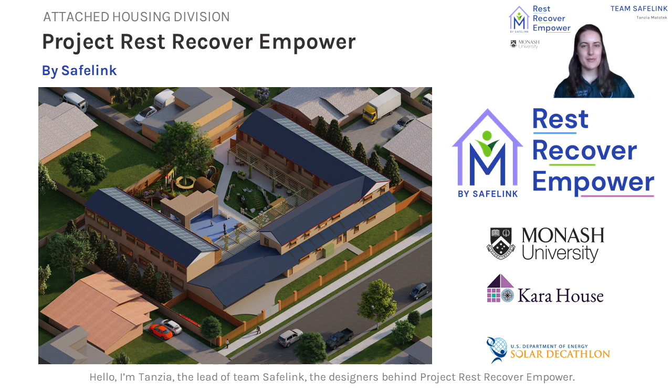Hello, I'm Tanzia, the lead of Team SafeLink, the designers behind Project Rest, Recover, Empower. Team SafeLink is a diverse group of undergraduate engineering and architecture students from Monash University in Australia, and we're passionate about designing safe housing communities for Australians in need. We're a team of 17 students, but presenting with me today is Sav, Lucille, Jamali, and Cheyenne to step through our design. Project Rest, Recover, Empower, or Project RRE, is a purpose-built refuge for women and children experiencing domestic violence.

These key values, rest, recover, empower, guided us to create a residential complex where these women in need can rest, where they and the environment can recover through sustainable design solutions, and ultimately where all occupants and stakeholders involved can be empowered.

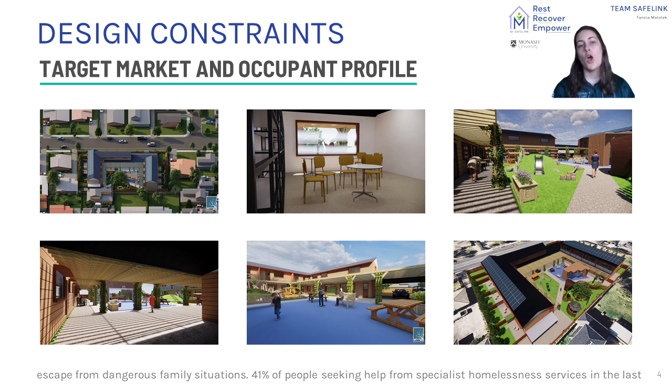Statistics show that it takes an average of 7 attempts for a woman to leave an abusive situation. Given that there are waitlists of over 2 weeks for current domestic violence refuges, Project RRE meets the desperate need for dedicated refuge housing in Victoria, providing a place of stability and support for families who are forced to escape from dangerous situations. 41% of people seeking help from specialist homelessness services in the last year were experiencing domestic and family violence. These situations could only have worsened with extended lockdown from COVID.

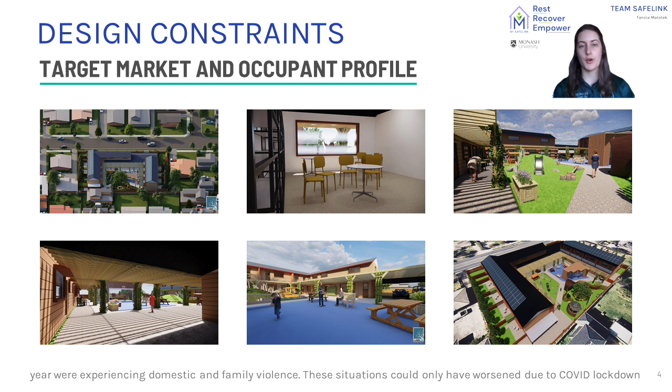Working with Kara House, a not-for-profit organisation which provides support and temporary housing for victims of domestic violence, we have designed an attached housing complex to cater to women of all ages and cultural backgrounds, inclusive of women with children, disabilities, and those identifying as LGBTQI+. As a government-funded facility, Project RRE is the first of its kind to provide dedicated, purpose-built spaces to support these women in need.

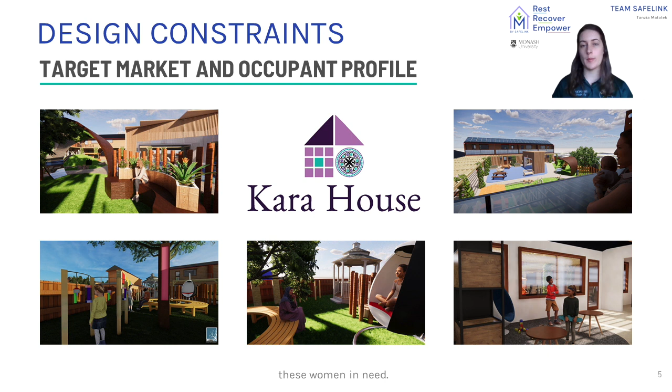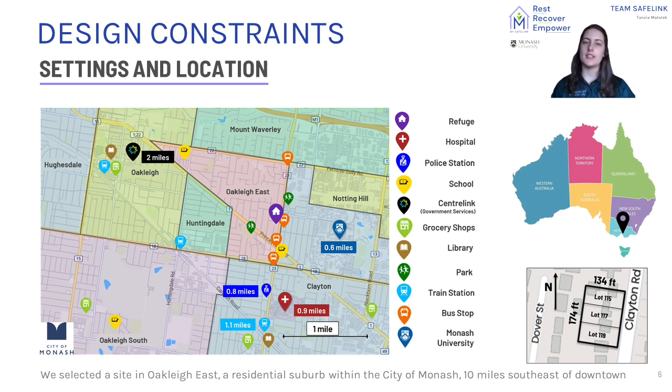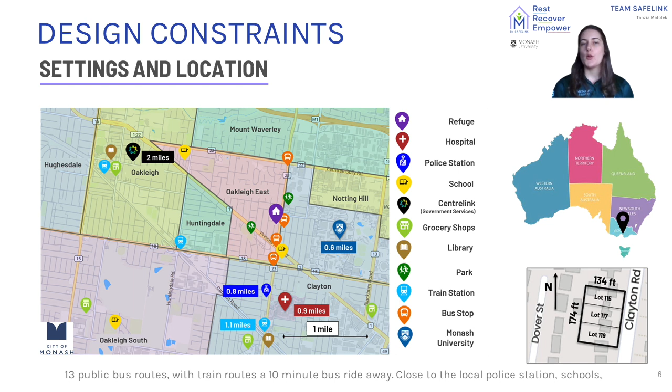For our site, we selected a plot in Oakleigh East, a residential suburb within the city of Monash that has a population of 6,500 and is located 10 miles southeast of downtown Melbourne, the capital city of Victoria, Australia. The plot is centrally located within walking distance to shopping districts and 13 public bus routes, with train routes a further 10-minute bus ride away. Close to the local police station, local schools, libraries, and health and government services, Oakleigh East is a safe, low-crime area that provides easy access to all the services an occupant of the refuge would require.

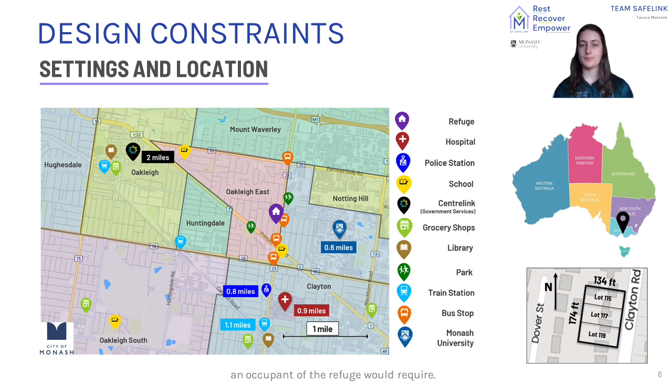Oakleigh East is within the metropolitan Melbourne area within the Australian Climate Zone 6, the equivalent to the US Zone 3C. It has a temperate climate categorised by moderate rainfall and limited temperature extremes. Located in the Southern Hemisphere, winter occurs from June to August, where Oakleigh East has an average daily minimum temperature of 43 degrees Fahrenheit, with summer occurring from December to February with an average daily maximum temperature of 78 degrees Fahrenheit. Having 2,700 heating degree days and only 450 cooling degree days means that heating is a greater consideration for the design. Approximately 29 inches of rain falls evenly across the year, making it suitable for rainwater harvesting.

If you're not familiar with Melbourne weather, it's known for experiencing all 4 seasons in one day, with weather conditions never lasting long and the sun coming out to shine for over 2,200 hours per year. This makes it an ideal climate for solar energy generation, which is the cheapest and most reliable renewable source for Australia.

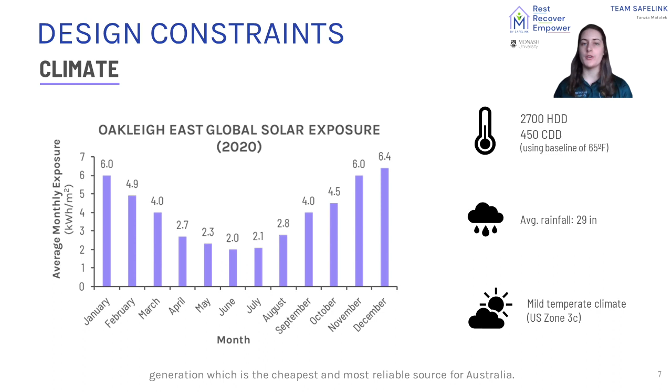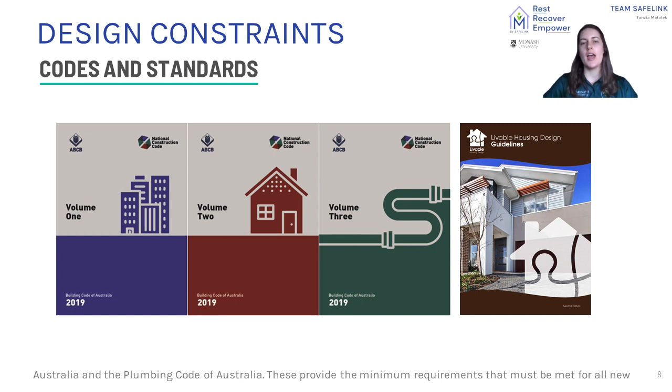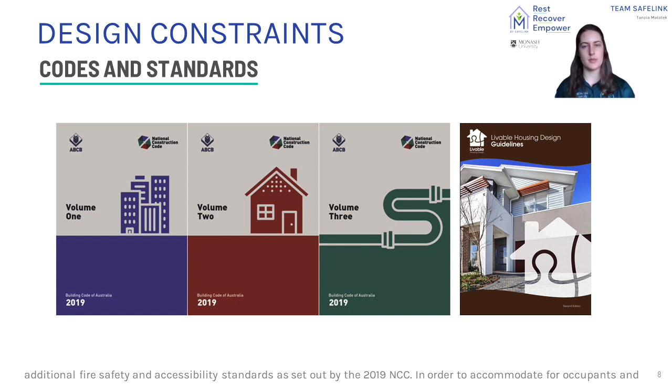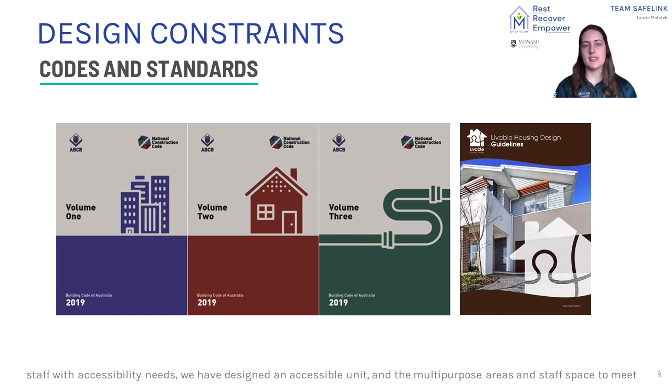The Project RRE building was designed in accordance with the 2019 National Construction Codes, which contain the Building Code and the Plumbing Codes of Australia. These provide the minimum requirements that must be met for all new buildings throughout Australia. The refuge is classified as a Class 3 residential building and is therefore required to meet additional fire safety and accessibility standards. In order to accommodate for occupants and staff with disabilities, we've designed a dedicated accessible unit and made sure that the multipurpose areas and staff space meet the highest standard in the Livable Housing Australia guidelines for disabilities.

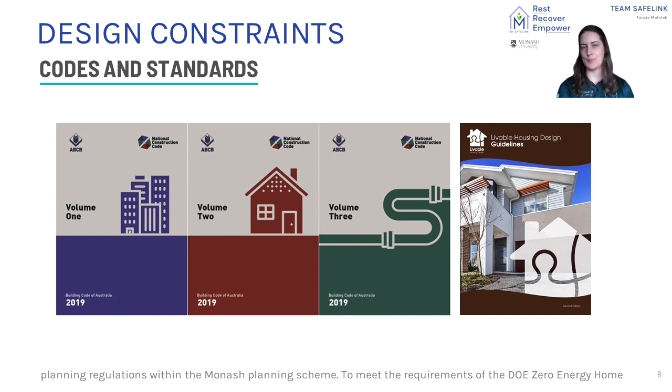Additionally, the building adheres to local council planning regulations within the Monash planning scheme, and to meet the requirements of the DOE Zero Energy Home, the prescriptive path was taken and comparisons were made between equivalent Australian standards when necessary so that we could meet all exhibits. Hopefully that's provided you enough context for the project, and I'll now pass on to Sav, who will go through our design goals.

Project RRE follows 5 key design goals, which address Cara House requirements. The most imperative goal was to create purpose-built spaces, such as the multi-purpose room for group therapy, restorative gardens, and dedicated staff areas to manage the refuge operations. Within the units, it was important to create a comfortable space that was suited to short-term occupancy periods, and Cara House emphasized how it was necessary to balance not being too comfortable or luxurious, as the goal was to get women back up on their feet and out of the refuge quickly, so they can continue their journey of recovery. Flexibility is a key design principle that sets our project apart.

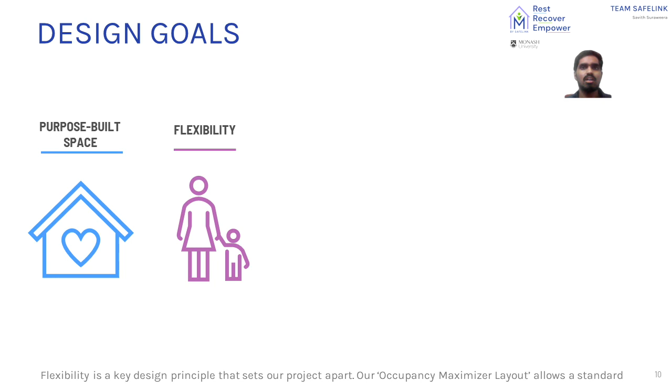Our Occupancy Maximizer layout allows a standard 2-bedroom unit to be converted into a 1 or 3-bedroom unit using an operable wall. This allows Cara House to adapt the units to varying occupant profiles, and accept women at the top of the waitlist. It also ensures that the complex maintains optimal capacity across the year and decreases wait time for women desperately needing a safe place to stay.

Given the dangerous situations these women are escaping, security and privacy were prioritized. This is done actively using security cameras and keycard access points, as well as passively through the site design. A U-shaped site layout provides an enclosed area hidden from the street, and the communal garden creates restorative areas of seclusion while also maintaining visibility to monitor occupant well-being.

The complex was designed to be easy to operate and maintain to smoothen the transition between occupants, which occurs every 4 to 6 weeks. The staff space allows 24/7 staff supervision, and the units have minimal storage and easy-to-clean surfaces to reduce changeover periods.

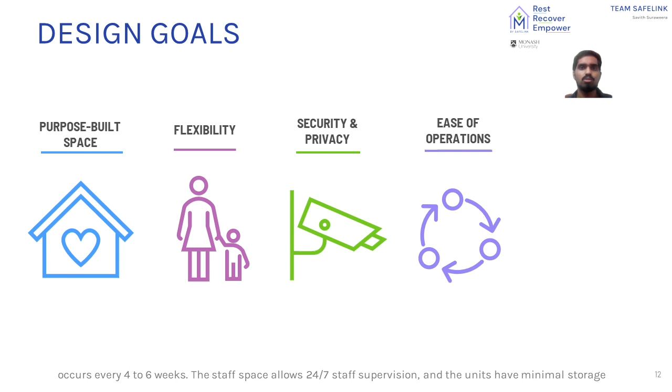The last consideration was to make sure the design appeals to all stakeholders of the refuge, not only the occupants and Cara House who will be using the refuge, but also the government who will be funding the project, and to demonstrate how a net zero refuge can be more efficient and cheaper over the long term. I'll now hand it off to Lucille to talk about the rest aspect of our project.

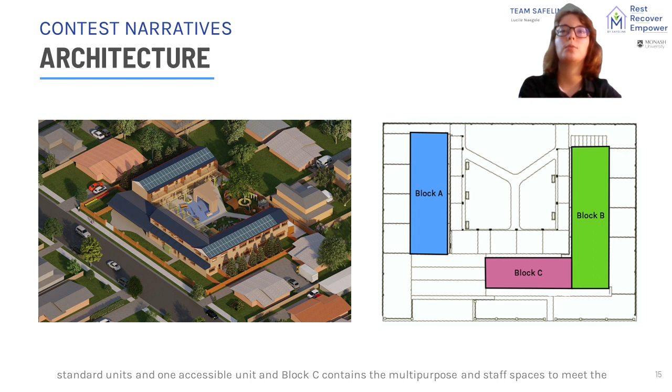The first major focus of the project was creating a residential space where the occupants can rest. Project RE has been designed as 3 blocks. Block A contains 4 standard 2-bedroom units, Block B has 3 standard units and 1 accessible unit, and Block C contains the multipurpose and staff spaces to meet the operational requirements of the refuge. In the center of the blocks is a communal garden to suit children of all ages, as well as an accessible pathway covered by a timber louvred pergola, providing access to each unit.

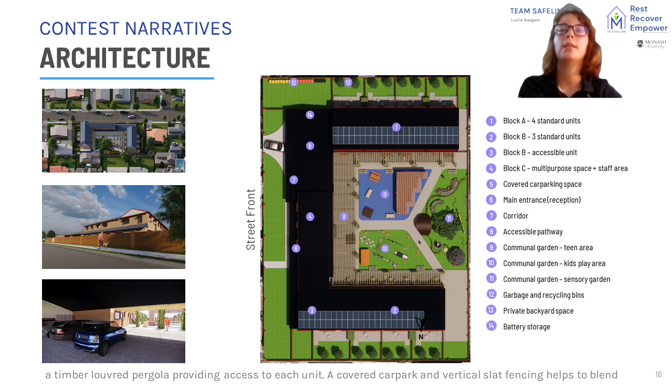The covered car park and vertical slat fencing help to blend in with the surrounding buildings and create a continuous front facade. There are 8 2-story residential units, all with an identical layout, except the 1 accessible unit which has greater clearances to accommodate wheelchair users. Each standard unit has 2 bedrooms, a fully functional kitchen, a bathroom, and 2 living spaces, 1 upstairs and 1 downstairs, as well as a private backyard and balcony space.

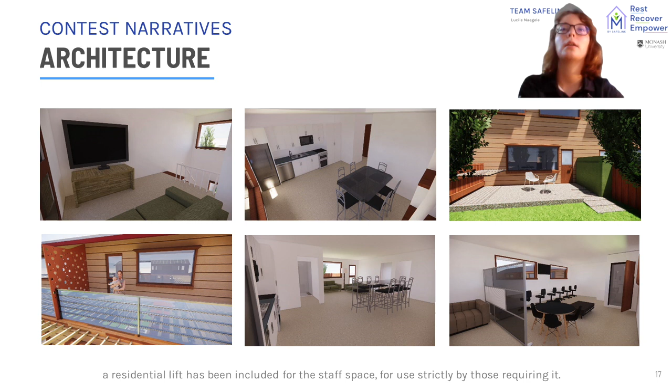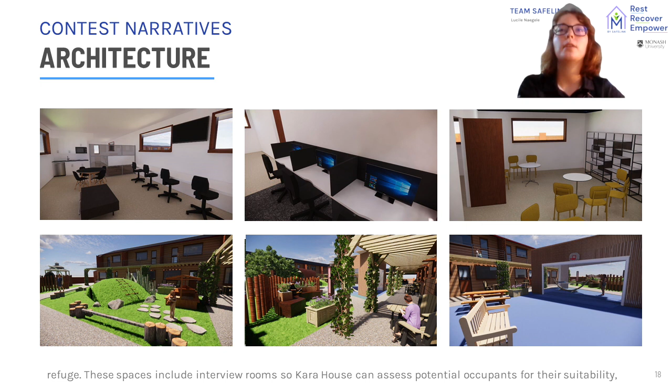Occupant safety has been prioritized with high balcony railing and wall-mount stair gates. To meet workplace equality requirements, a residential lift has been included for the staff space for use strictly by those requiring it. In addition to the residential units, a dedicated multipurpose and staff space have been designed for the operation of the refuge. These spaces include interview rooms so that Kara House can assess potential occupants for their suitability, child play areas, a shared computer for occupant use, and a flexible space for group therapy and other activities.

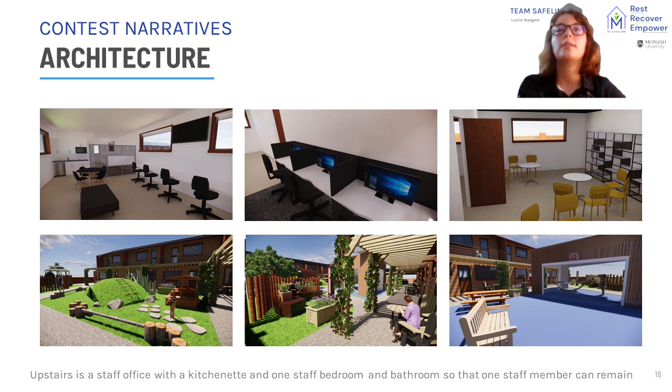Upstairs is the staff office with a kitchenette and 1 staff bedroom and bathroom so that 1 staff member can remain on site at all times as per refuge requirements. In the center of the complex is a communal garden that contains a natural playground for small children and a small basketball and soccer net for older children. Seating out the front of each unit and the multipurpose space allow occupants to supervise the children as they play and create opportunities for interaction.

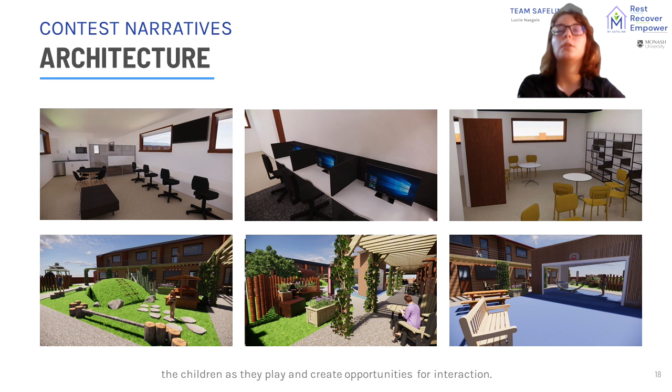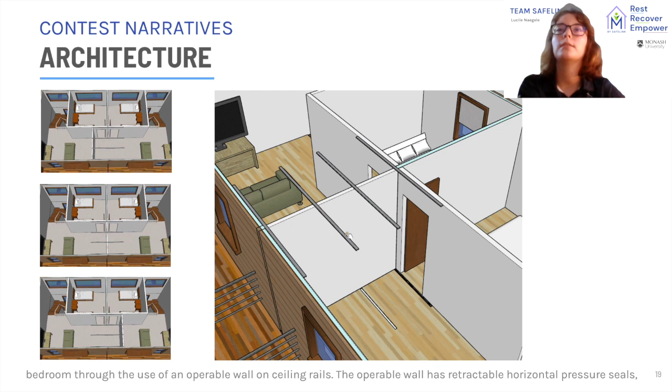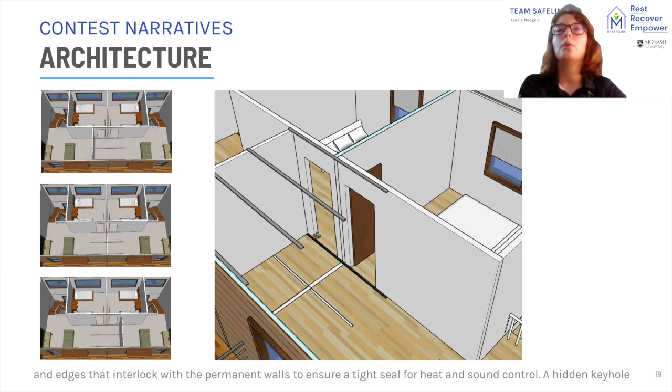The key design in Project RE is the Occupancy Maximizer layout that changes which unit has access to the upstairs bedroom through the use of an operable wall on ceiling rails. The operable wall has retractable horizontal pressure seals and edges that interlock with the permanent walls to ensure a tight seal for heat and sound control. A hidden keyhole allows the door to be locked in place, and only Kara House will alternate the positions during occupant changeovers.

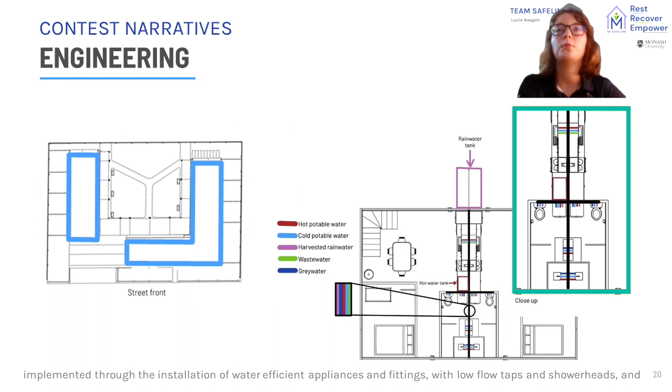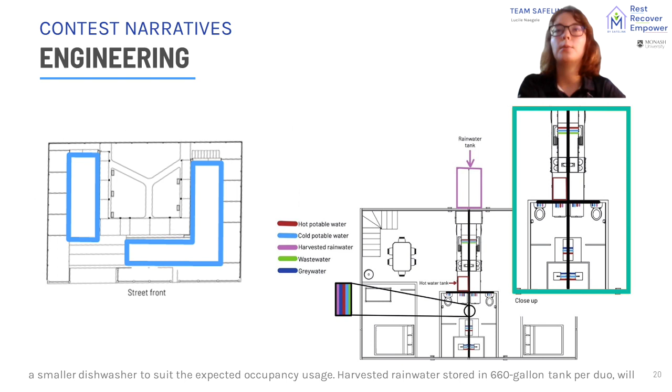The site has been designed so that there are 2 building envelopes so that subsystems can be shared across the units. This allows all utilities to be centralized along the adjoining wall of a 2-unit duo. Water efficiency strategies have been implemented through the installation of water-efficient appliances and fittings, with low-flow taps and shower heads, and a small dishwasher to suit the expected occupancy usage. Harvested rainwater stored in a 660-gallon tank per duo will provide water for toilet flushing and clothes washing. Grey water collected from showers is used for garden irrigation.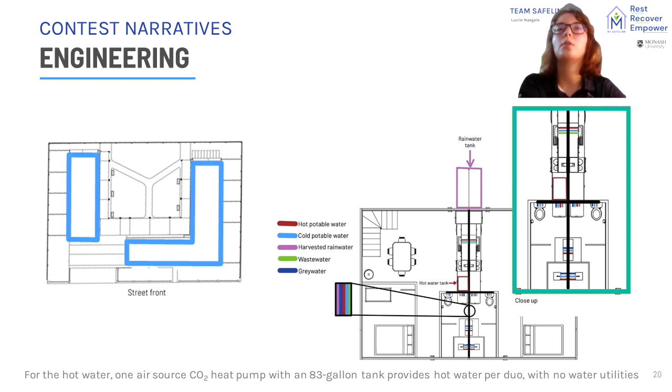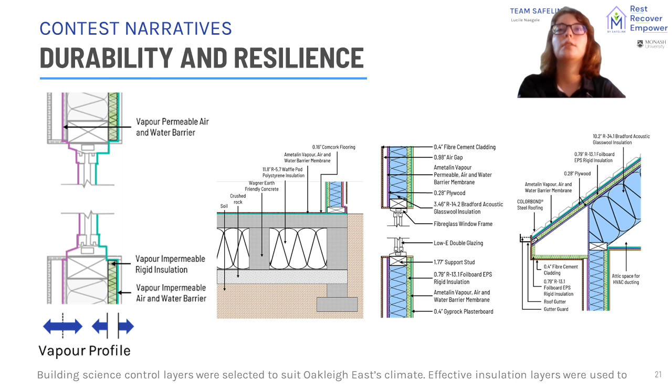For the hot water, 1 air source CO2 heat pump with an 83-gallon tank provides hot water per duo, with no water utilities on the first floor of the residential blocks to reduce plumbing infrastructure. Building science control layers were selected to suit Oakleigh East's climate. Effective insulation layers were used to reduce heating loads.

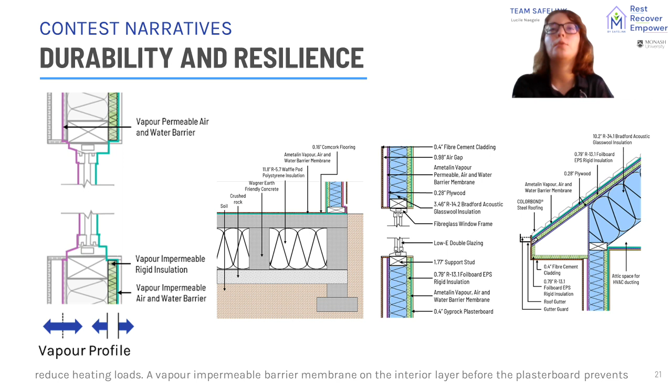A vapor-impermeable membrane on the interior layer before the plasterboard prevents warm air from inside leaking into the wall cavity, where it is at risk of condensing in cooler weather. The vapor-permeable watertight external membrane allows any warm air that does escape into the wall cavity to exit to prevent mold formation. Both these membranes are also air and watertight, preventing entry both internally and externally. These membranes create a continuous seal across the foundation, walls, and roof of the buildings to create a strong thermal, vapor, air, and water envelope.

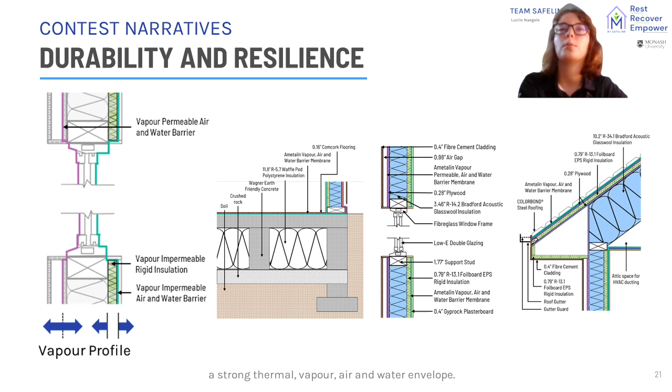To further increase the durability of the refuge over its 50-year lifespan, locally sourced Australian materials were selected to withstand Melbourne's climate conditions. Some examples include fiber cement cladding, which is low maintenance and durable. Colorbond steel roofing is hail resistant, easy to install and replace, and is flame resistant.

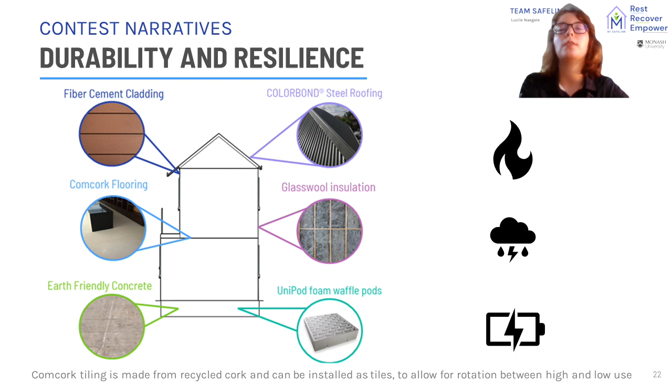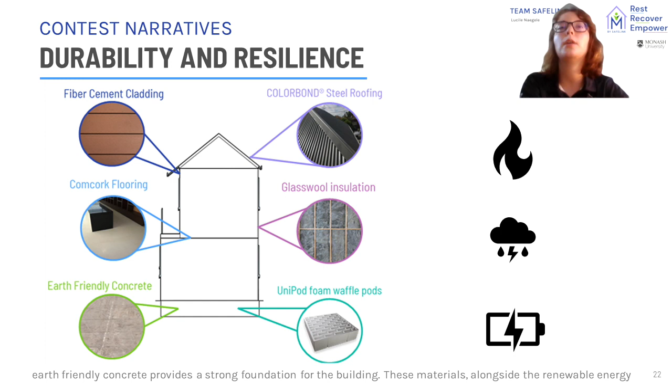Comcork tiling is made from recycled cork and can be installed as tiles to allow for rotation between high and low use areas to extend the life cycle of the material. Glass wool insulation is non-combustible to protect against fire, and finally, earth-friendly concrete provides a strong foundation for the building. These materials, alongside the renewable energy battery system, protect against the biggest threats of fire, storms, and electrical blackouts.

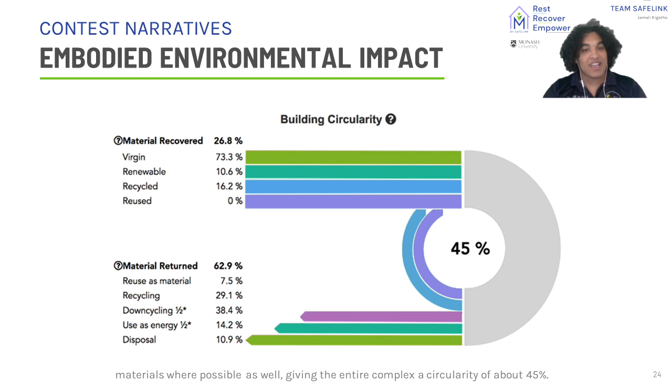So when choosing our materials, we prioritise locally sourced materials and lightweight construction to overall minimise the emissions involved in building the refuge. We wanted to use renewable and recycled materials where possible as well, giving the entire complex a circularity of about 45%. A key consideration for this when looking at the embodied environmental impact was the large cement slab we use for our foundation. To minimise the emissions involved in this, we used an earth-friendly cement that has 45% lower emissions than traditional Portland cement, and we also used a waffle pod grid to greatly reduce the amount of cement we actually needed to build the slab.

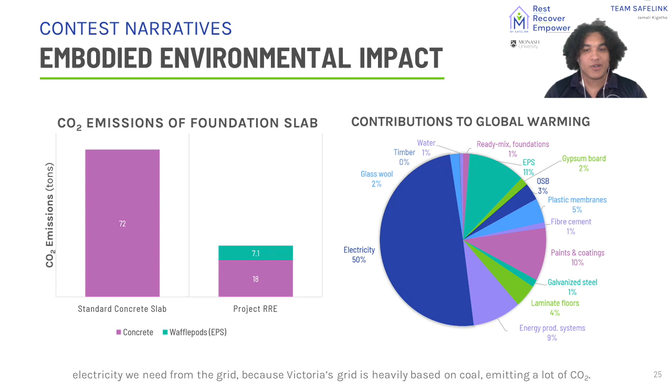And with all these factors considered, we found that our biggest impact on climate change would be due to the electricity we need from the grid, because Victoria's grid is heavily based on coal and emits a lot of CO2. So given this, it was very important for us to reduce our reliance on the grid. Given Melbourne's sunny climate, solar was the obvious option for us, and we tested two systems.

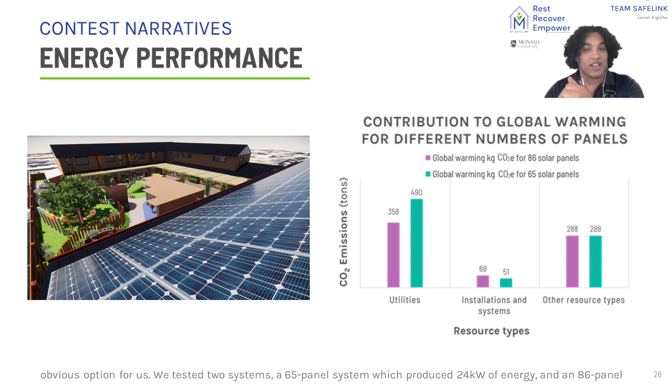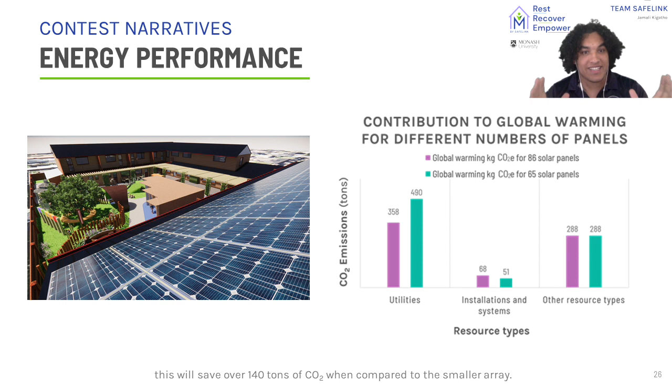We tested a 65 panel system which produced 24 kilowatts of energy, and an 86 panel system that produced 32 kilowatts of energy. We ended up going with this larger one because it reduced our dependence on the grid to only 16% across the whole year, and over the lifespan of the building would actually save 140 tons of CO2 when compared to the smaller array. We coupled this larger array with four 10-kilowatt-hour batteries to help Kara House have maximum flexibility and adaptability depending on the occupants' different usage rate, because that will be changing all the time.

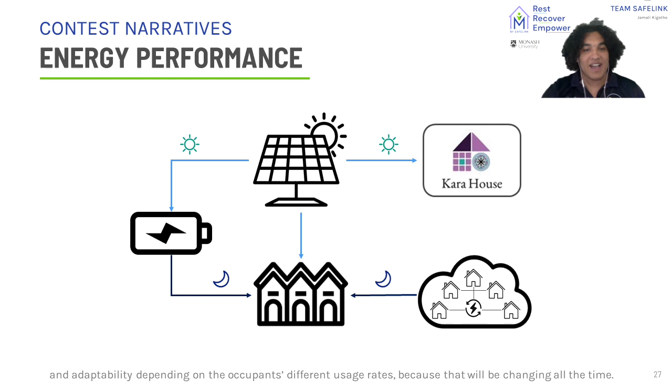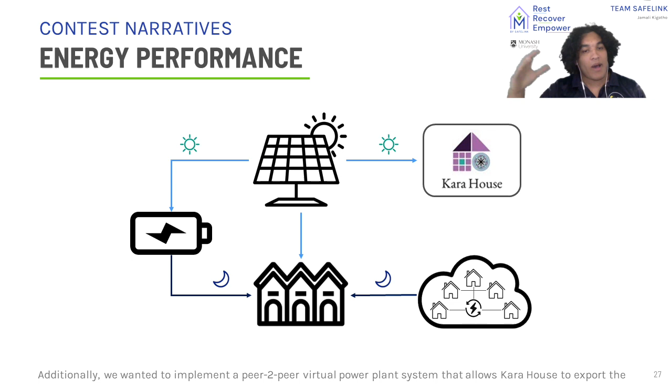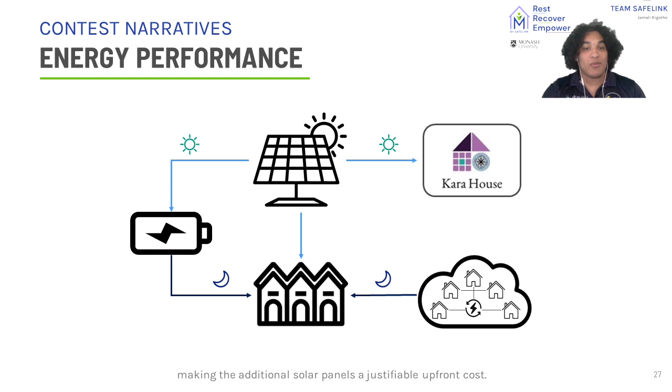Additionally, we also wanted to implement a peer-to-peer virtual power plant system that allows Kara House to export excess solar energy, especially in summer, to nearby transition housing to overall reduce Kara House's carbon footprint even more. And also by providing them more funds, this will save them about $50,000 over 20 years. And this made the additional solar panels a justifiable upfront cost. The energy modelling showed that only 84% of our energy was produced on site.

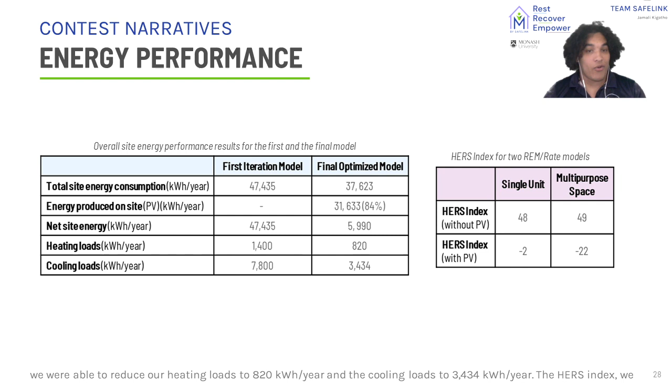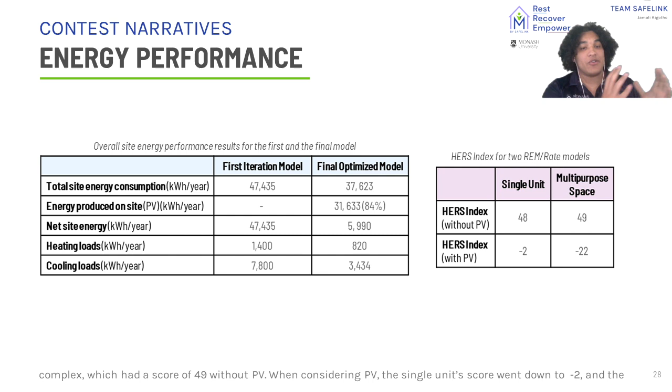Through software like DesignBuilder, we were able to actually get our heating loads down to 820 kilowatt hours a year, and our cooling loads were 3,434 kilowatt hours a year. The HERS index, we did this by assessing one single apartment, which had a HERS score of 48 without PV, and the entire multi-purpose complex, which had a score of 49 without PV. When considering PV, the single unit score went down to -2, and the multi-purpose space went down to -22.

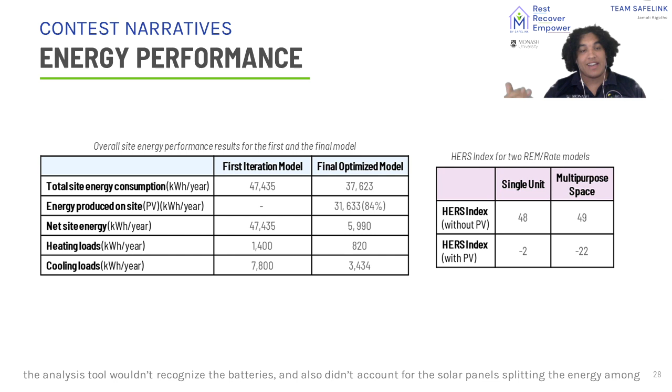And the true HERS index score will be somewhere in between these two values, because the analysis tool didn't recognize the batteries and also didn't account that the solar panels would be splitting their energy amongst the apartments, even though the multi-purpose space has a lot more panels on its larger roof size.

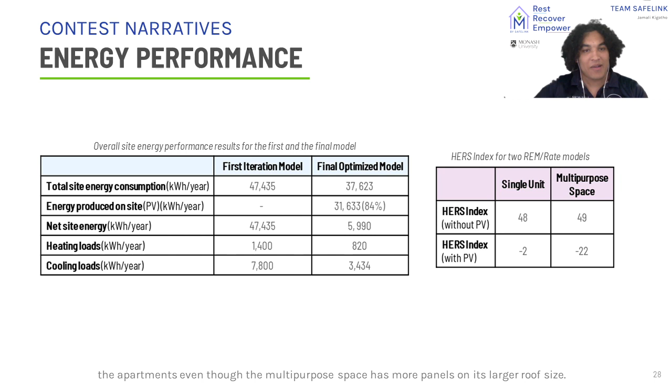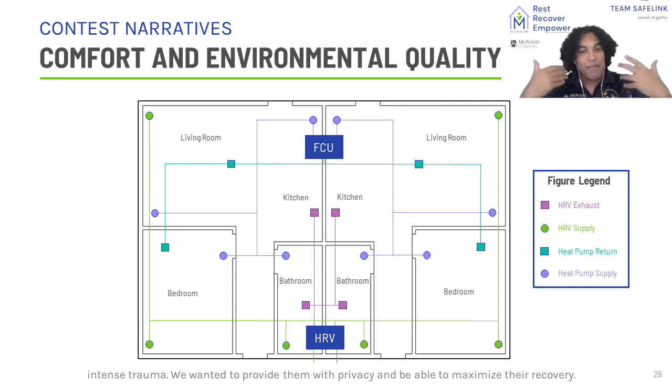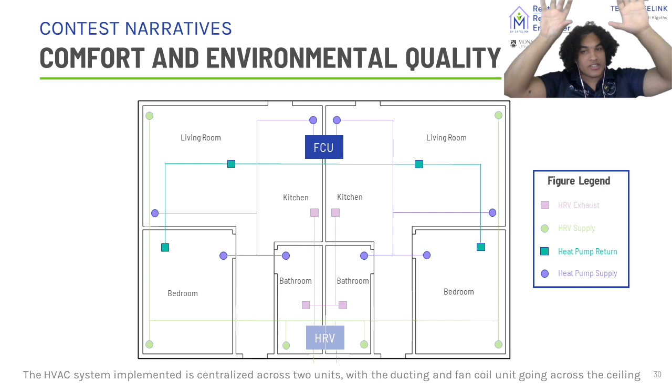We also wanted to have a comfortable and quiet living space, especially because these women and kids are recovering from intense trauma. We wanted to give them privacy and be able to maximize their recovery. The HVAC systems implemented were centralized across 2 units, with the ducting and fan coil unit going across the ceiling or the attic cavity, depending on each story.

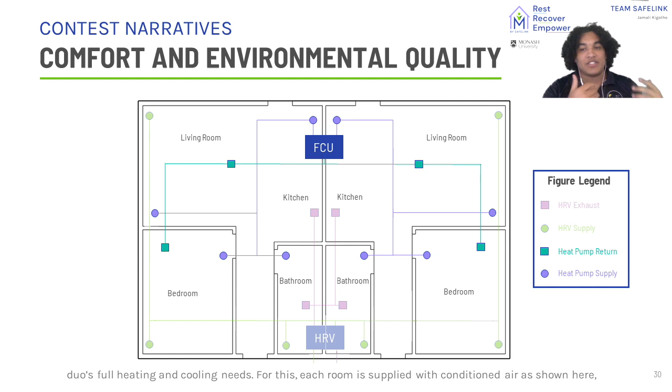2 fan coil units will be supplied by 1 Daikin reverse cycle air source heat pump to meet a duo's full heating and cooling needs. For this, each room is supplied with conditioned air, as shown here, maintaining a comfortable year-round temperature of about 72 degrees Fahrenheit.

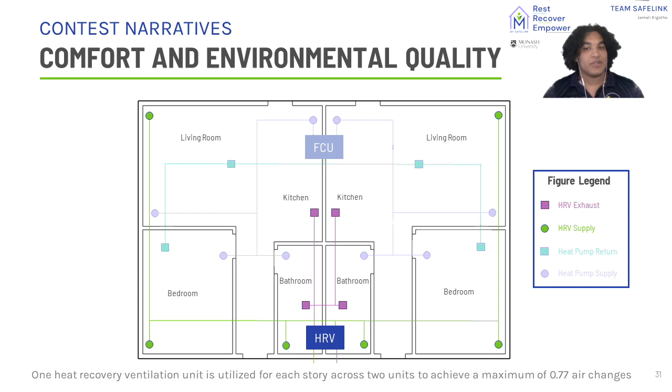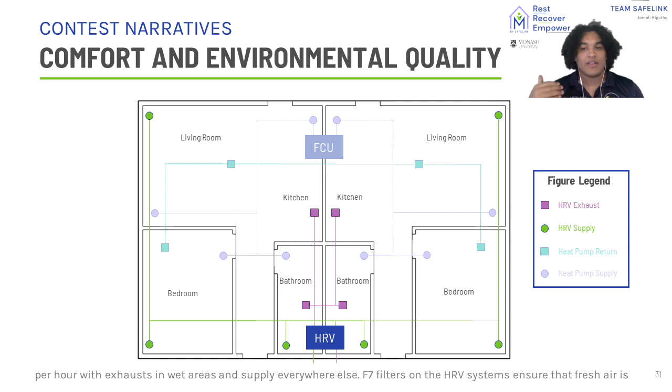One heat recovery ventilation unit is utilised for each story across the two units to achieve a maximum of 0.77 air changes per hour, and there were exhausts in the wet areas and supply everywhere else. F7 filters were also used in the HRV system that ensure fresh air is provided, free of bushfire smoke and other pollutants that you might find in Victoria.

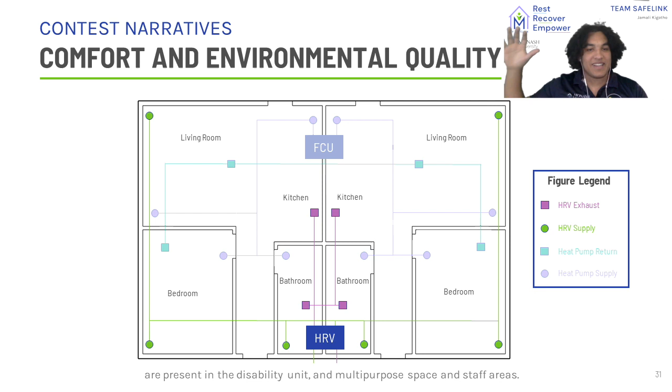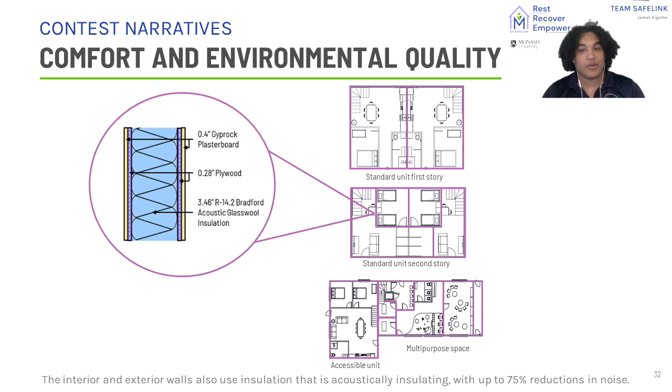Similarly, appropriately sized appliances were also used in the disability space and the multi-purpose space and staff room. The interior and exterior walls also use ceiling insulation that is acoustically insulating. By up to 75%, it will reduce the noise. Glass wool insulation has been used on all adjoining walls, as shown in purple here. Anyway, I'll now pass you over to Xian, who will talk about the last bit of our focus.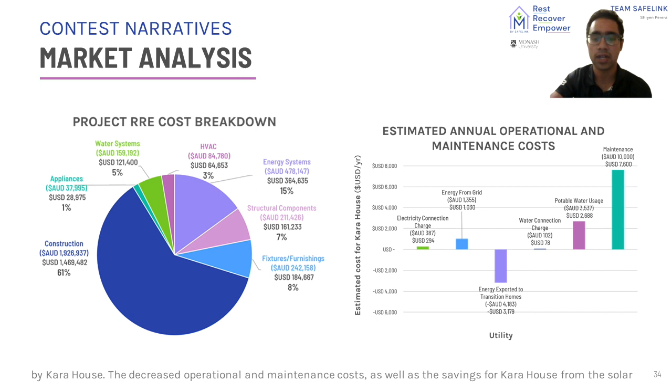The empower aspect of our project lies in empowering not only the women and children staying at the refuge, but also Kara House in the operations and the government agencies in encouraging them to build more net zero purpose-built refuges. A key consideration of our design was ensuring financial feasibility while also allowing our design to be as flexible as possible. The estimated construction cost for Project RRE is $2.4 million, which is below the $2.7 million budget as advised by Kara House. The decreased operational and maintenance costs, as well as the savings from the solar virtual power plant, reduce ongoing reliance on fundraising and government funds.

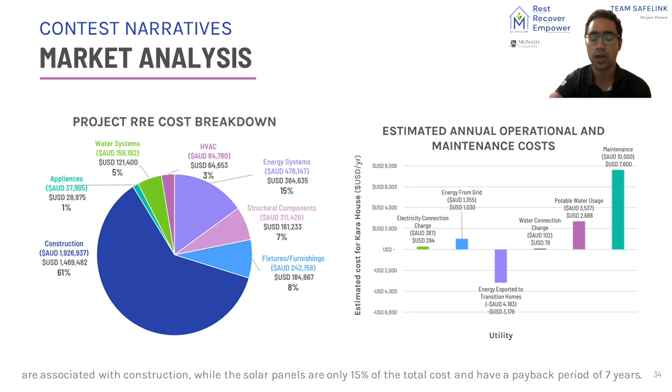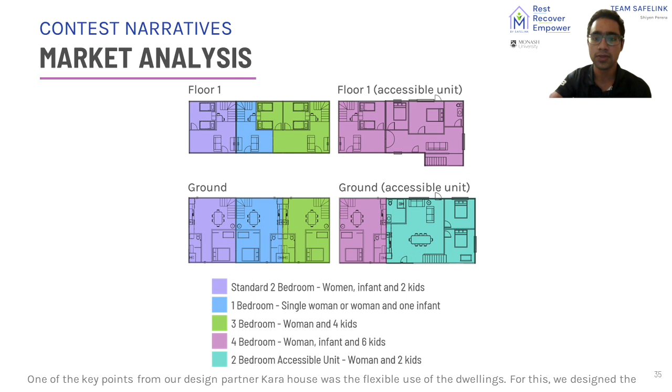One of the key points from our design partner Kara House was the flexible use of the dwellings. For this, we designed the Occupancy Maximizer layout, as Lucille mentioned earlier, which is achieved through an insulated operable wall. These effectively work in duos of units to modulate from a standard 2-bedroom unit, as highlighted here, which can accommodate 1 woman and 3 children, to a 1-bedroom for a single woman with an infant, or to a 3-bedroom for a woman and 4 children.

The accessible unit has an additional 2 bedrooms and provides the adjacent unit with access to the upstairs bedrooms, allowing for a high occupancy unit which can accommodate 1 woman with at least 7 children, through the use of bunk beds. Currently, this demographic is being underserved, as most refuges can only accommodate small family sizes. This configuration allows the accessible unit on its own to house a woman and 2 children. Overall, this allows Kara House to be flexible and empower other refuges to follow.

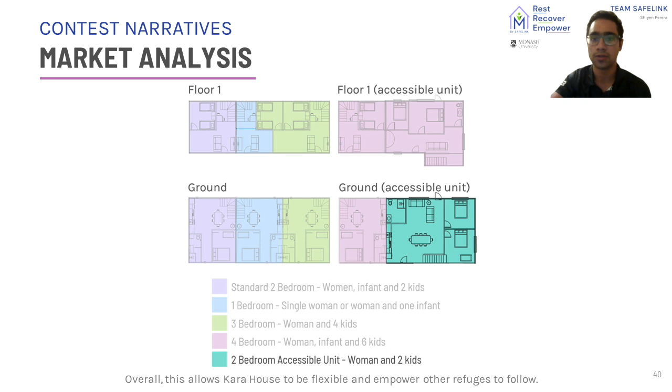Within the refuge, systems have been designed to ensure the complex is easy to maintain with a low-maintenance exterior and native vegetation. Centrally controlled and programmable keycards give Kara House control over the refuge operations. The units have been designed to be comfortable for the occupants but also easy to manage during occupant turnovers. Green spaces have been incorporated throughout the complex.

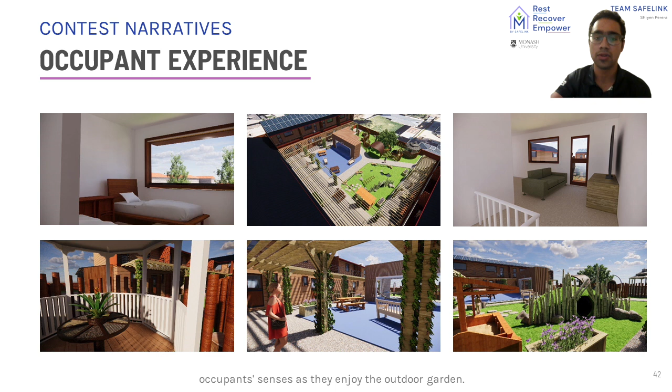Within the design of the communal garden, the attention restoration theory was used to create spaces that allow occupants to divert their attention from the stresses they are experiencing and focus instead on the present. Textures, color, and fragrant plants have been included to engage occupant senses as they enjoy the outdoor garden. The unit layout was optimized to suit the orientation of each block. Natural lighting has been prioritized for both orientations, and both upstairs and downstairs living rooms have been designed to ensure that each block has a north-facing living space.

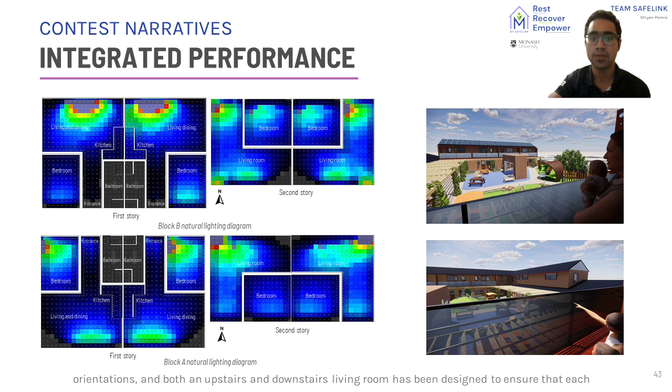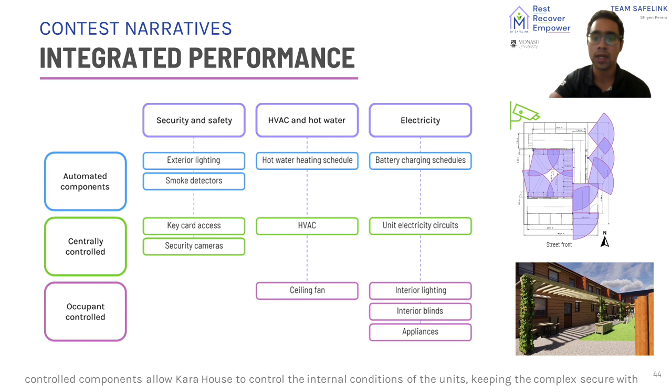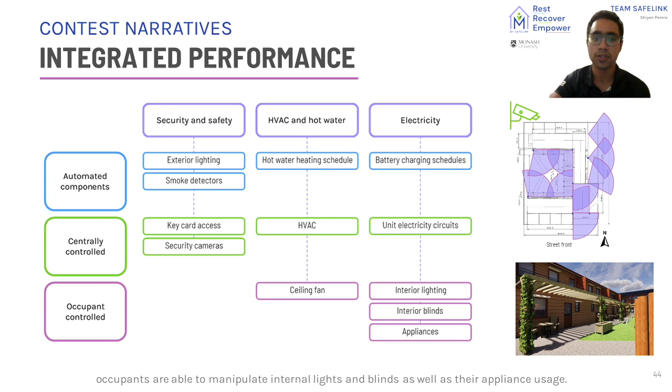For the building subsystems, automated components ensure the energy systems operate efficiently on their own. Centrally controlled components allow Kara House to control the internal conditions of the units, keeping the complex secure with camera monitoring and turning off power to a unit when it is unoccupied. Finally, to provide a sense of control, occupants are able to manipulate internal lights and blinds as well as their appliance usage.

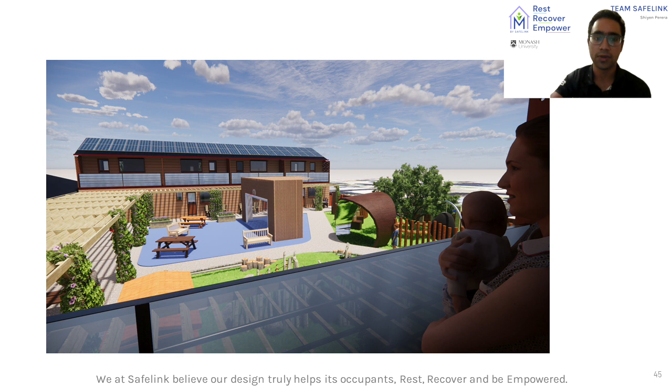This now brings us back to our principal objective of providing purpose-built, safe housing for domestic family violence-affected women and children. Through this design, Safelink hopes to bring net zero concepts to the public housing space, showing its feasibility and sheer effectiveness in being environmentally friendly. We at Safelink believe our design truly helps its occupants rest, recover, and be empowered.